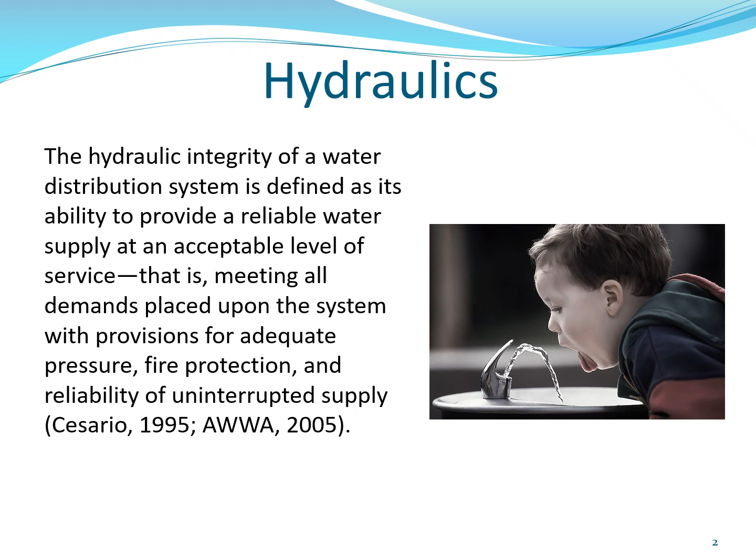That leads us into capacity. According to the Safe Drinking Water Act, Part 11, Sub-Rule 5, Number 1, distribution systems shall have sufficient capacity to meet peak demands, including fire flow demands where fire protection is provided, while continuously maintaining a minimum pressure of 35 psi throughout the distribution system under normal operating conditions, and 20 psi during emergencies such as firefighting. That last bit has a little more nuance to it.

So if a water system is to provide capacity, that means it in a bunch of different fashions. Capacity means you're able to meet the demand of your system regardless of what time it is, whether it's peak demand, low demand, and so on. Capacity can be met in a number of different ways.

Capacity can be met by making sure you have a water plant sufficient enough size to produce water to meet your peak daily demand along with your overall capacity. You may have well houses, making sure you have enough wells and enough water from those wells that they're not going dry and damaging the pumps, but are also able to provide enough water to meet the capacity and demand of your system.

And sometimes it's not just about the source that it's coming from. Sometimes it's making sure you have adequate water main size, that they are big enough to provide enough water and flow to meet your demands.

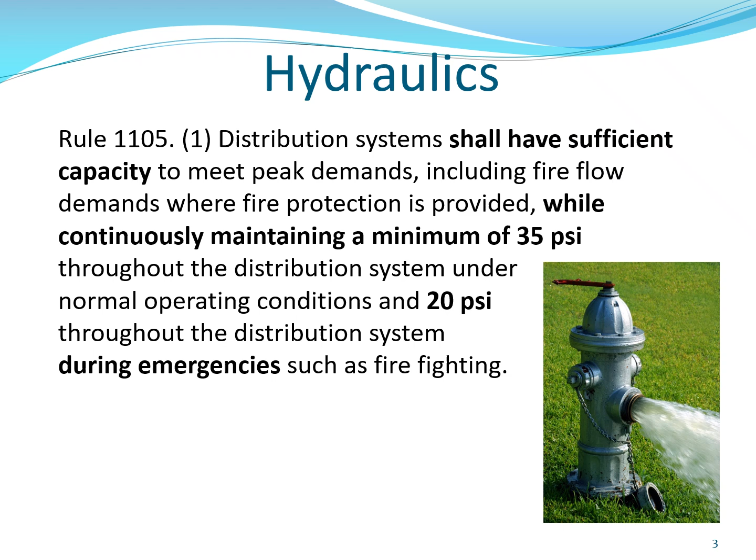Another thing is that a lot of times cities undergo reliability studies. The reliability studies make sure that all those things I just discussed are in place, meaning you have a way to provide adequate capacity to your system through various means, such as the right size water mains, water storage, and capacity at your plant or your well houses, and so on. All of these drawings and layouts of your system are going to be included in your general plan that we talked about with rules and stuff.

So if you remember, hydraulics is the study of liquids in motion and at rest, and water within your distribution system is at motion all the time as it's flowing through your pipes.

It's at rest in your storage tanks, and it takes the shape of the containers that it is put into. So it has a weight, it has a density, and water exerts pressure, especially if it's being driven by gravity.

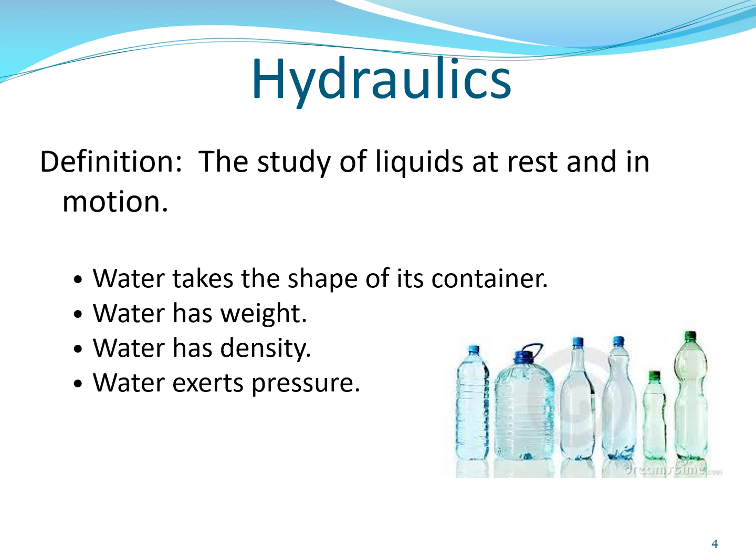The very first thing, if you remember, we talked about friction. Friction is the resistance of change in motion. Objects, or water included, want to resist motion, but when they are forced to move, there is friction involved. So as water moves through the pipe, it's going to experience friction loss moving through a water main. The rougher the pipe is, the more friction loss we're going to have.

Head loss is the amount of height that... well, head in general is the height of water, but head loss is in reference to the loss of vertical distance water can travel due to a conversion of its energy, and that would be friction. The more friction loss you have, the more head loss you have. We talked about that in that other section with that example talking about a water treatment plant.

Now, the next thing we're going to talk about is the continuity equation. We also talked about that a little bit, and that's talking about flow through pipes, and it also talks about flow through reduction of pipes. If you go from a 12-inch main to an 8-inch main, it's 100 gallons per minute as the flow in is going to be equal to the flow out. That is another thing to keep in mind when doing this.

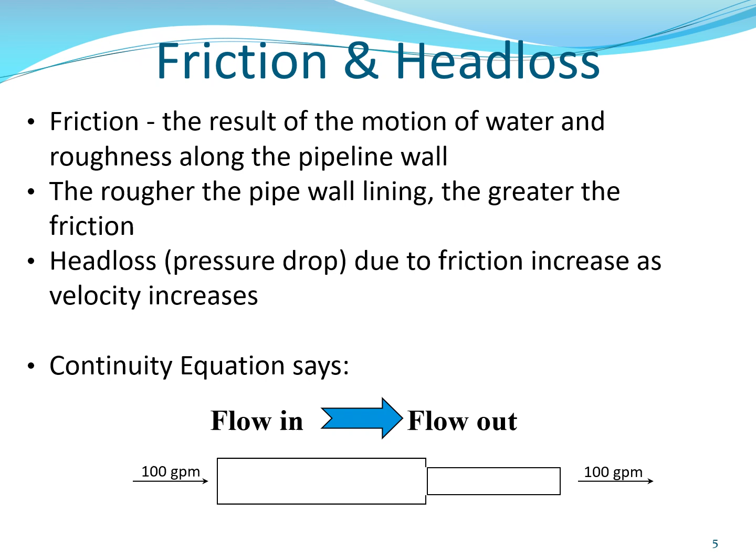Part of the presentation, we're going to talk about the various types of pumps, a little bit about history of pumps, some terminology about pumps, and just some general knowledge about the pumps that are used in the water industry. Let's talk about the history of pumps.

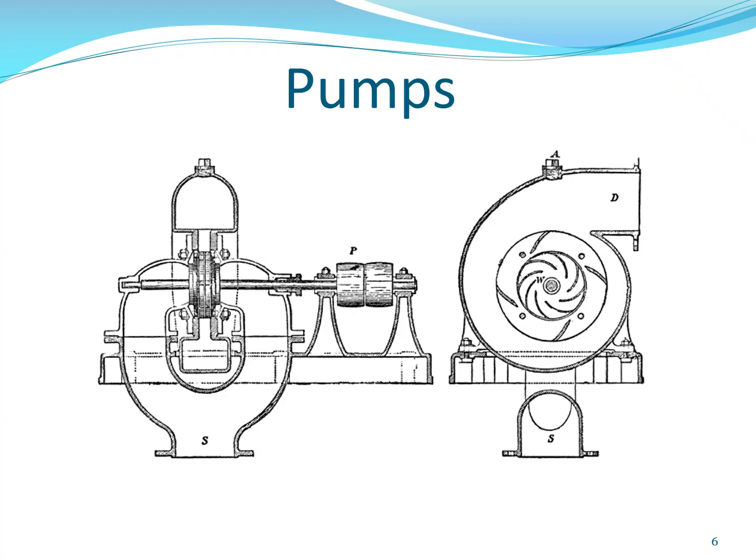So pumps, believe it or not, are over 2,000 years old. The first documented pump that we know of is the Archimedes screw pump, invented 287 BC by Archimedes, who was a Greek inventor and philosopher.

So what a pump is essentially is a mechanical device that transports liquids from an area of low pressure to high pressure, one of low elevation to high elevation, or it also moves more water. And you see this in various different things with our high and low service pumps at our plants, your booster stations, or even lift stations for wastewater.

The screw pump is still something that, when you hear of lift pumps, is still in use in wastewater, because anything that fits in the void space of it will be pumped. So pumps consist of some sort of impeller, some sort of drive device, and some sort of motor that moves this drive device in order to move the liquids from one area to another.

So they're going to be used in various different fashions for filling tanks, adding additional pressure, or just even adding more flow coming out of a well or coming out of a plant. And they're going to be driving into our distribution systems, our reservoirs, or even in booster stations to help just transport and add more pressure to our faraway customers.

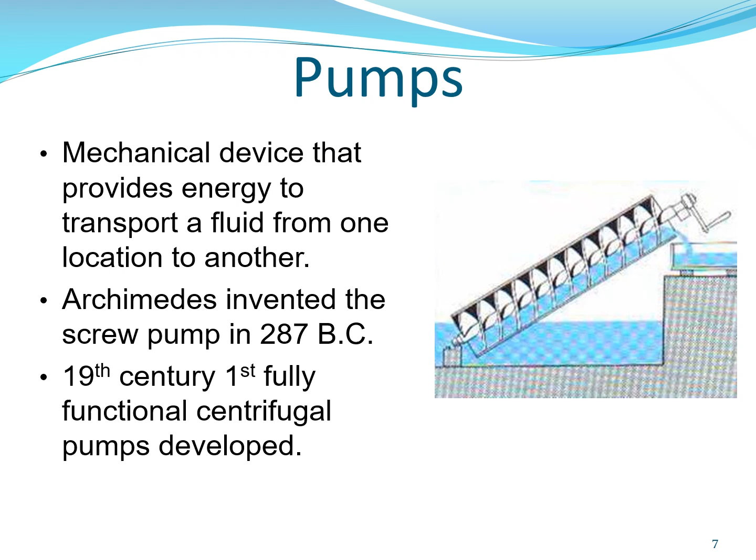So there are lots of different pump terms that can be used here. You have suction lift, static discharge, total dynamic head, prime, impeller, casing, shaft, shaft sleeve, packing, lantern rings, separator rings, packing gland, cavitation, brake horsepower, pump curve, and efficiency. And the thing is you don't need to know all these by exact definition, but you have to have an idea of what they are.

So suction head or lift is the vertical distance between the center line of the pump and the free liquid or surface of the liquid or water that is being pumped. Suction lift is lifting it. And suction head is feeding down into the pump, but it's from wherever that water line is down.

Then you have your static discharge head, which is the vertical distance that a pump, after the pump, can push the water. Now you have total dynamic head, and total dynamic head is a combination of the total amount of head or vertical space that a pump can move the water, either lifting it or pushing it, or a combination of both.

Prime is when a pump casing and the impeller shaft itself is completely full of water, so that when the pump is engaged or turned on, it is able to suck and pull water through it.

Now an impeller, this is a piece of the pump that pushes the liquid and moves in a circular motion using centrifugal force to push water.

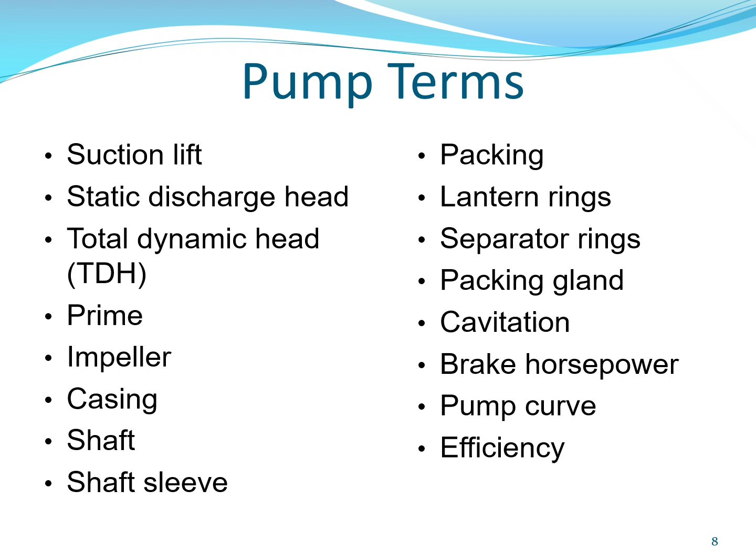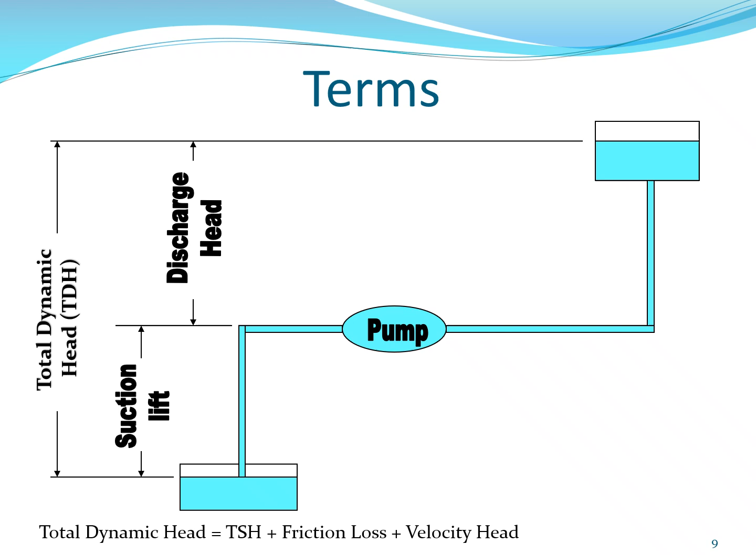Now, suction head is a little bit different. As you can see, suction head here feeds down into the pump. So when it's feeding down into the pump, and this is what you see a lot of with horizontal drive shaft pumps, the suction head is pushing down into the pump, and then it's discharging out. That is all known as discharge head, okay?

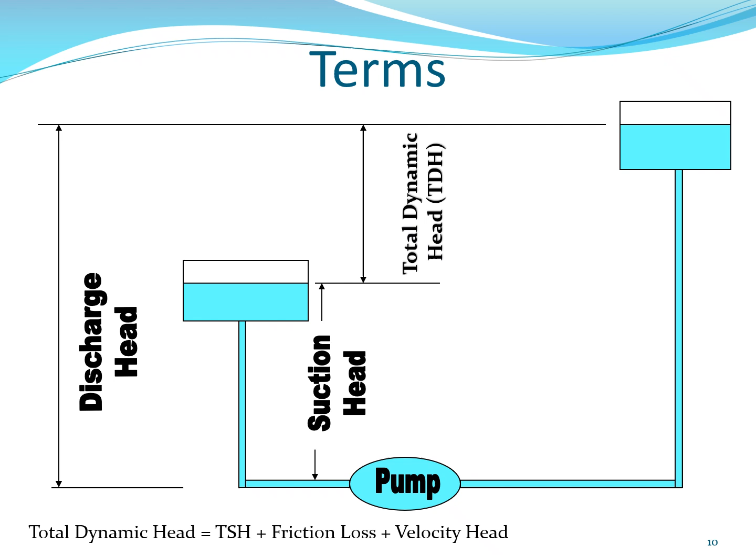So there are three main types of pumps that exist. The main other type is known as a jet pump, but we're not really going to talk about that. So we're going to be talking about centrifugal pumps and positive displacement pumps.

Your positive displacement pumps are your chemical feed pumps, all right? So we will not discuss jet pumps, which is the third type of pumps here, because jet pumps are not used in municipal fashion. They're used in non-community small installations, and they're used in houses too, because they work where they inject pressure down into the pump casing or well casing, and then it forces water back up. But those are not anything that produce enough water.

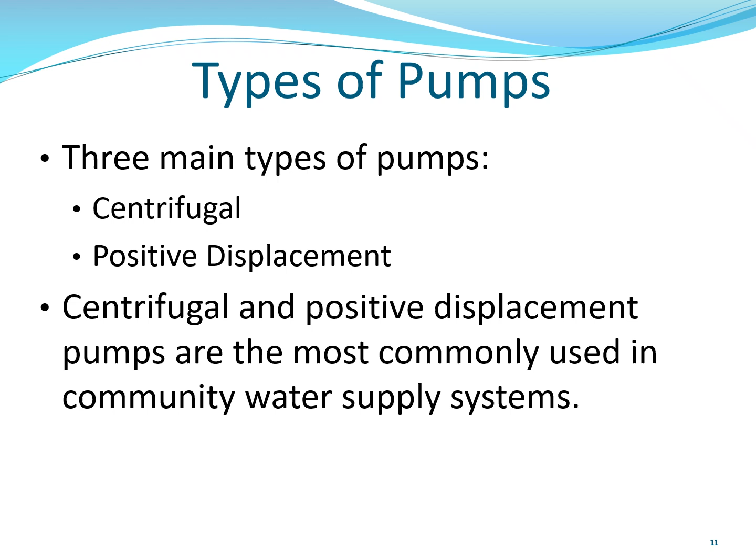So centrifugal and positive displacement are the most commonly used pumps in a community water supply. And like I said, positive displacement is a chemical injector pump, where centrifugal are the ones that are used for producing and pushing and sucking up water and discharging it from the treatment plant.

So the types of centrifugal pumps, all right, we're going to have a line shaft vertical turbine, a horizontal turbine, and then a submersible vertical turbine pump. Vertical turbines and submersible vertical turbines look identical to one another, just they operate a little bit in different fashion, and they're positioned differently in a well casing used for that.

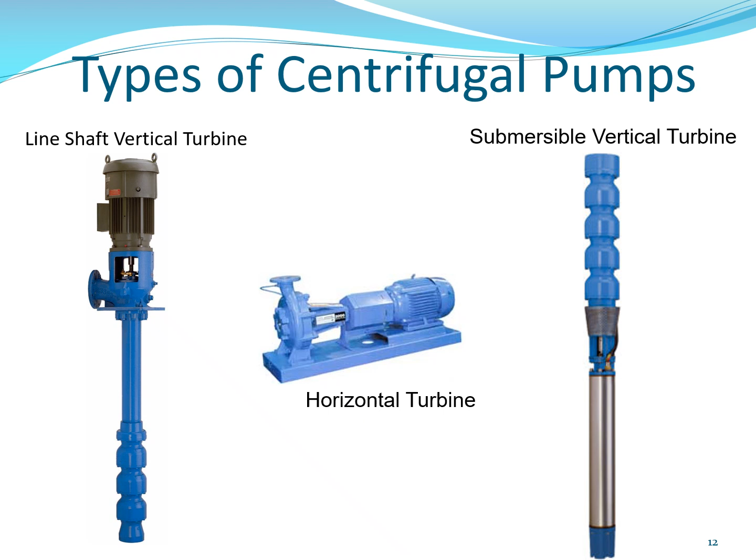Horizontal turbine pumps are different from both of these because they are in a left to right fashion where the motor sits horizontal to that of the impeller. And this is typically that suction head diagram you've seen earlier. That's typical of a horizontal turbine because water feeds down into it. We'll talk about that and show examples of that.

So one big thing to keep in mind is cavitation. Cavitation sounds like, when it's going through a pump, it sounds like your pump is literally pumping gravel. It'll make some pinging and dinging noises, so just think about what that would be.

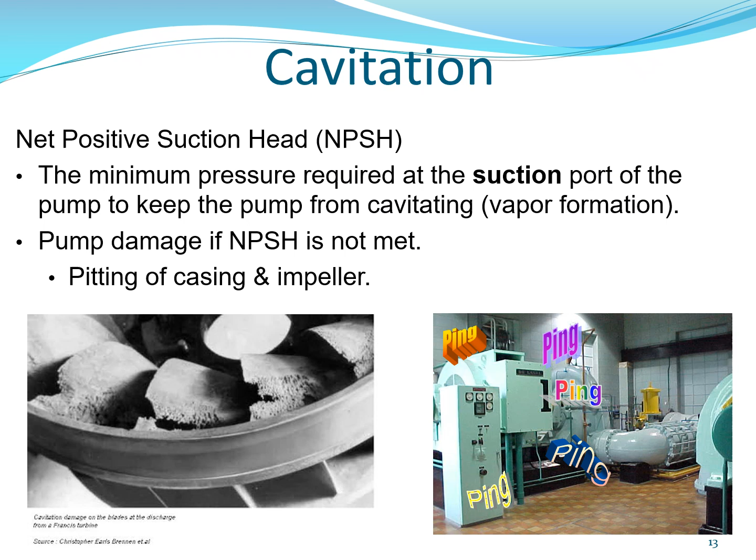So if you ever cavitate your pump, it's going to create vapor lock and vapor bubbles, which will then damage your equipment. It can increase corrosion rates because of the addition of air. These are very bad - the introduction of air bubbles during cavitation will cause long-term damage to your pumps.

So that's typical of horizontal turbine pumps - the water cascades into them because they often lose prime if not. But these are the two typical types of pumps you're going to see used for high and low service pumps at water plants, of varying different sizes. They can produce a ton of water, and can also serve as booster pumps if need be, especially the vertical turbines out in your area.

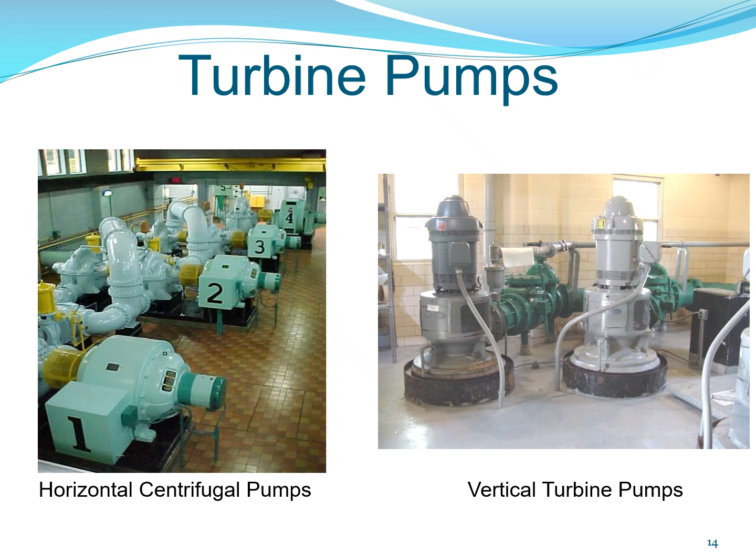So horizontals have a much shorter shaft on the left there versus a vertical turbine, which has a longer shaft directly into the clear well itself.

So one thing about line shaft vertical turbine pumps is they are common in pumping water in lots of different applications, especially because the impellers are lowered down into some sort of tank or clear well. The impellers rotate with the shaft.

I don't know that I talked about this, but you're going to get multi-stage impellers. The more impellers that are on a pump, the more pressure and total head it pushes. More impellers does not mean more water production on a pump - more pumps means more water production. The stages or impellers of a pump, this goes for any of them, just means it'll give more pressure to the water and push it further, giving it more head and energy.

So how this works is the water comes in down through the screen on the bottom of the shaft here. It comes into the first impeller, then it's fed up and kicked off to the left. As you can see, there's a void space up here at the top, and that void space is where you're going to find your stuffing box for maintenance on these things, with the packing gland and separator rings we talked about earlier.

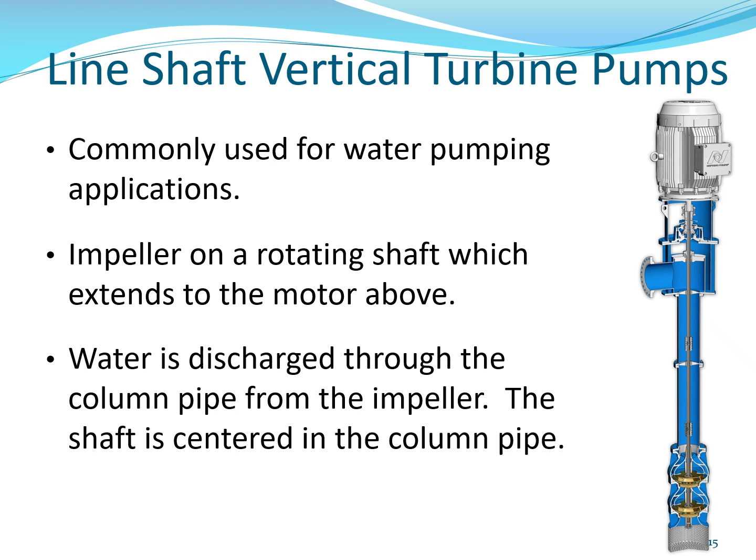And you have the pump right here on top, the motor's on top. As you can see, the shaft is centered directly down the case from it and into the clear well itself.

Horizontal centrifugal pumps have the motor lying horizontally. These a lot of times are high service pumps or booster pumps when priming is not a problem. That's why water needs to be fed down into these - if they are on a similar level, a lot of times they will cavitate themselves and lose prime. And when a pump loses prime, it's not necessarily going to move water as much.

So that's why they have to have suction head, meaning the water cascades down and they're typically below grade for that matter. So some of the disadvantages is the lubrication of it - because the water is held horizontal to it, the motor and pump shaft are directly in line with where the water is.

Whereas on a vertical turbine, the water's got to get up there - gravity, if turned off, is not going to allow it to get to it. Whereas in this horizontal setup, gravity pulling down into it could pose a problem with getting in there and lubricating the pump shaft and replacing the packing gland and so on. So lubrication and maintaining prime are the two biggest problems with horizontal pumps.

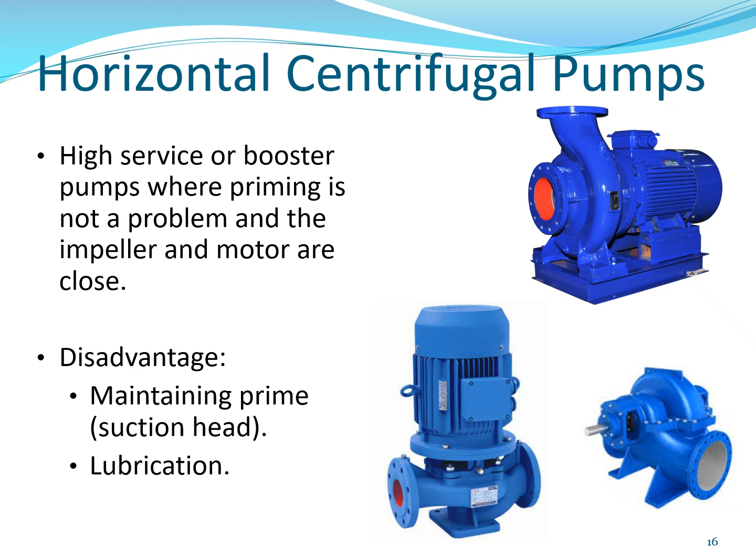So the next type of pump we're going to be talking about is submersible pumps. Submersible pumps are a lot like a vertical turbine pump, and they have a lot of similarities in what they look like. But the big difference about a submersible versus a vertical turbine pump is that it is reversed. The motor is mounted on the bottom of the impellers, and it's also lowered down your well casing and into your well. With submersible pumps, they're called submersible because they're placed on a well casing or they are completely submerged in water.

Now, with these, they have some advantages to them. Some of the advantages are they have no internal valves except the check valve. There's no lubrication needed due to the fact that they're lowered into a water column and always in water or some liquid. There's typically no need for any type of cooling apparatus because of this. They have a low initial startup cost, and they require little room in comparison to the capacity amount, and they're practically noiseless for the fact that they are lowered down into these casings.

So what's a disadvantage to these? One thing that needs to be talked about here with a submersible pump, they do make these all the way up to 2,000 horsepower. Another thing about submersible pumps is they have a very short shaft. But when these are operated on a VFD, you cannot just turn them down, because they are operated to have a certain amount of water flow through them.

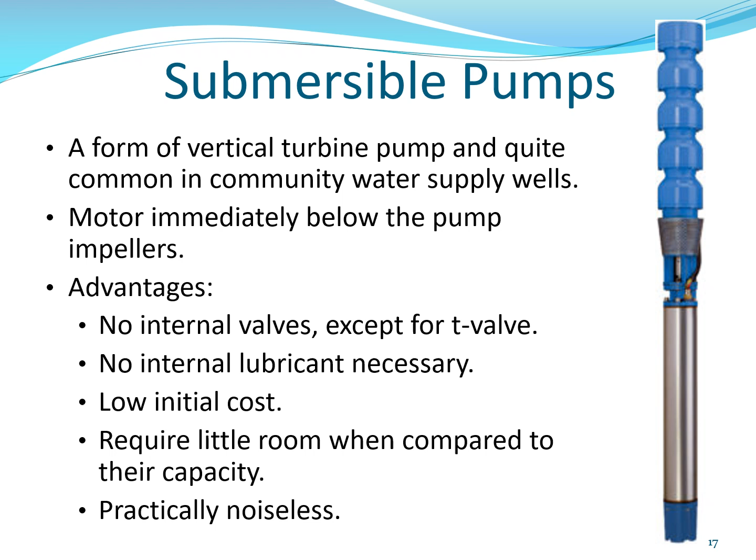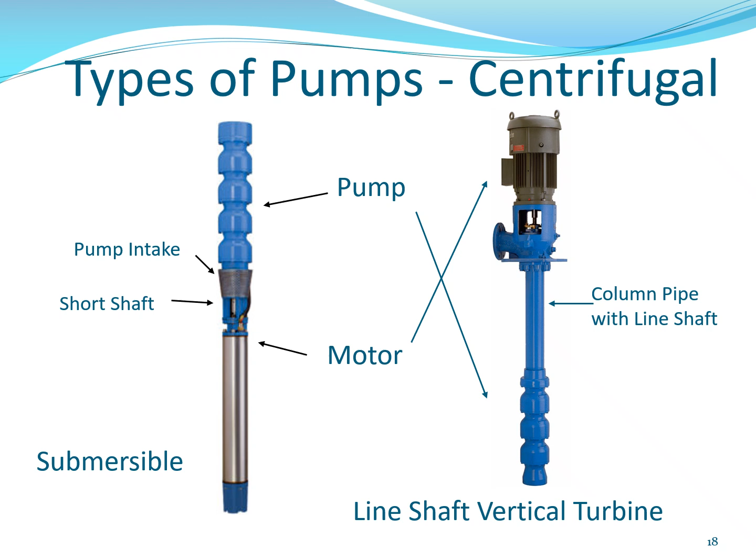So here are the different types of centrifugal pumps, showing the vertical turbine pump versus a submersible. You can see that they're very similar in nature. Now the shaft is much shorter on a submersible, and the motor location is separate. But as you can see, there's a pump intake screen, multiple impellers, and the water is pumped by the impellers moving in an upward motion and pushed or pulled. So it's very, very similar. The pump shaft is different. Of course, the submersible is not going to have your stuffing box with packing glands and separator rings and lantern rings like the vertical turbine does. But as you can see, they're very, very similar in nature here.

Now, on the next slide here, we're going to talk about impellers. There are three different types of impellers.

You have an open, a semi-open, and then you have your closed impeller. They each have their own functionality. Open is used for solids handling - this is what you're going to see in wastewater plants or with sludge pumps and so forth. Semi means it's dealing with moderate abrasive slurries - you could use this in pumping cement or sludge because it's mixed abrasive, not something that's going to have big chunks in it.

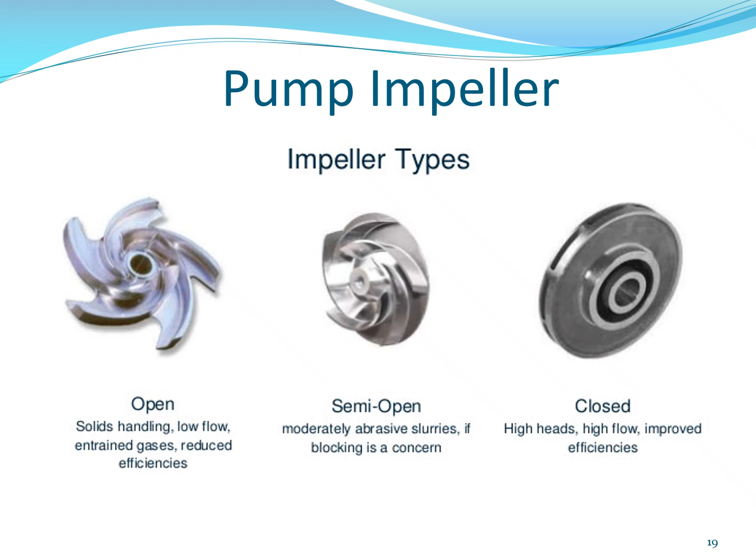Closed ones are used for high head, meaning lots of pressure to push the water, high flow, and improved efficiencies. Because it's a closed system, it doesn't have the void space that open ones have. The closed ones are what you're going to see on your high and low service pumps, your submersibles, and so on.

Here's a breakdown of some pump parts, showing impellers, casings, and horizontal setups. This is where they were replacing the horizontal impeller, done at the Saginaw water plant. This is a 33 MGD pump - that pump can produce 33 MGD, which honestly in this realm of things is kind of small fries compared to some much larger plants.

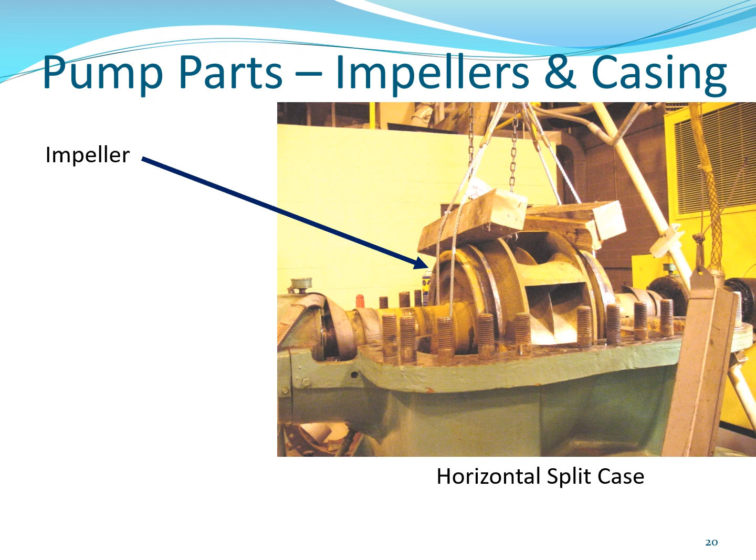Here's showing how the impeller works. The water enters through the middle of the impeller, and as the impeller spins, it throws it out into the impeller casing using centrifugal force. It uses circular motion to give the water pressure. As it spins, it throws the water out, and with additional stages, it moves up to another impeller, which gives it more pressure, then up to another, giving more head. So multi-stage pumps do not produce more water, they produce more head.

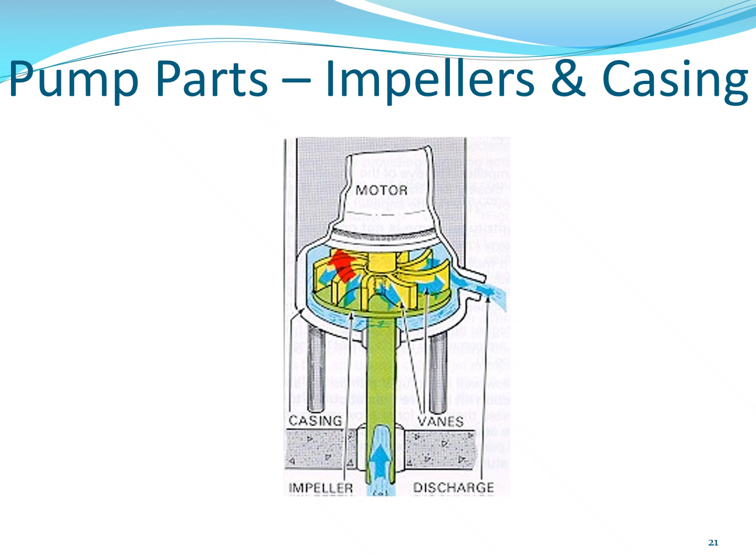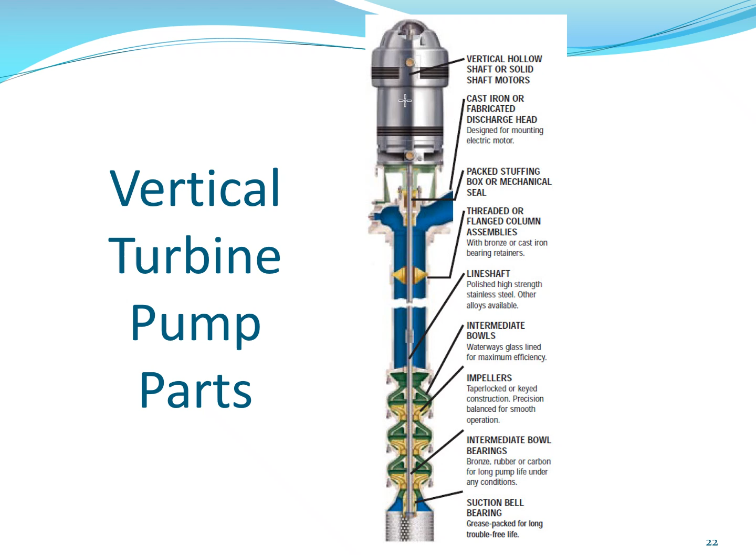Here gives you an idea of what you're looking at with vertical turbine pump parts. With a vertical turbine, you have your motor up top, then your packed stuffing box, which includes your lantern rings, separator rings, and so on. Then you have your line shaft, and on it you'll have your shaft coupler and shaft sleeve down it. You have your impellers and your bowl bearings attached, and then your screen at the bottom that brings this all up. As you can see, this is like a 3-stage pump here.

Now as it continues, you have your packing gland, which looks like a nylon rope impregnated with graphite, and it's cut to fit typically. As you're restuffing the box, you cut these glands to fit, put a separator in, do another one, and there's going to be multiple. You want to make sure after you've repacked a stuffing box that you do not tighten it too tight - there are specifications for how these are supposed to be packed and tightened. If you tighten them too tight, there's a good chance it will not get the leakage that is necessary. A lot of times in a plant you're going to see little channels cut out on the floor - those channels are on purpose, allowing the leakage occurring from the pump to go down a drain so it isn't a slip and fall hazard.

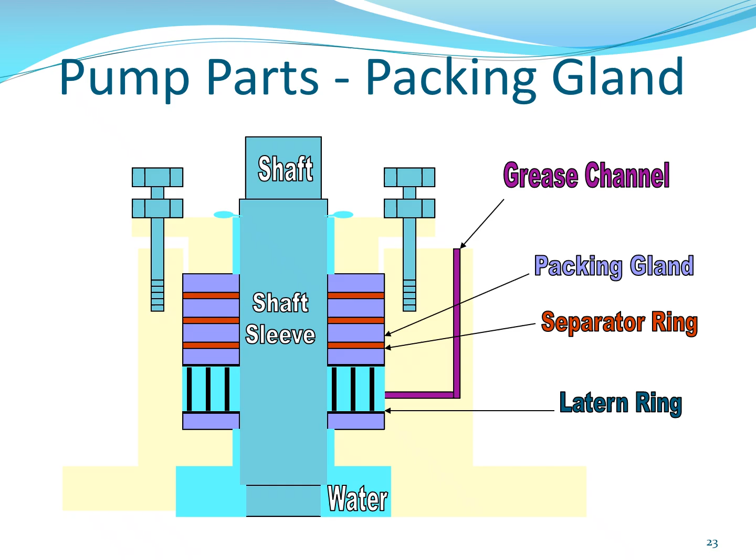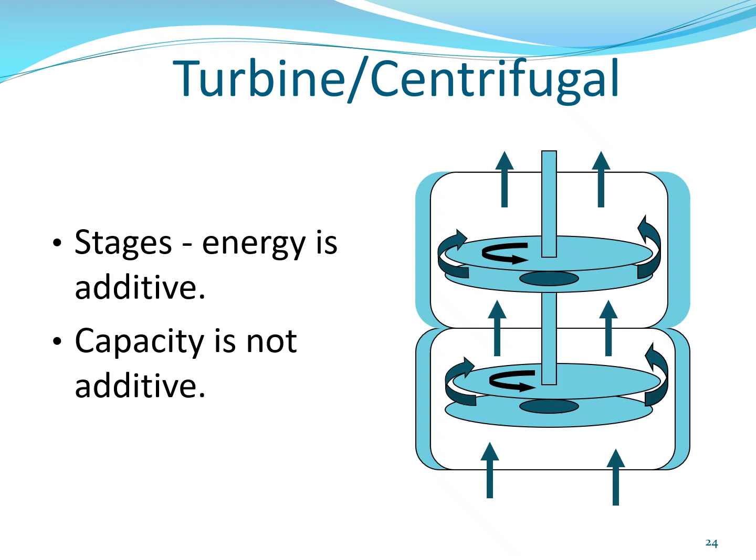The reason we call them turbine and centrifugal is because the water comes up in the middle, spins in a circular motion, and throws the water out and up. Then it continues on to another stage. Like I've said multiple times, stages add energy, not capacity. If you want more capacity, you have to add another pump. Stages will not do it.

Now, positive displacement pumps. There are lots of different positive displacement pumps out there: diaphragm, peristaltic, gear, and piston. But the two we primarily use for positive displacement pumps in our water systems are diaphragm and peristaltic. These are used for chemical injection. Some have self-metering or self-feeding using electropotential measurement to adjust their feed rates. Some are manually adjusted after a check. It just depends on what type of system you have. Your larger systems are going to have online SCADA that self-adjusts based on how things are changing.

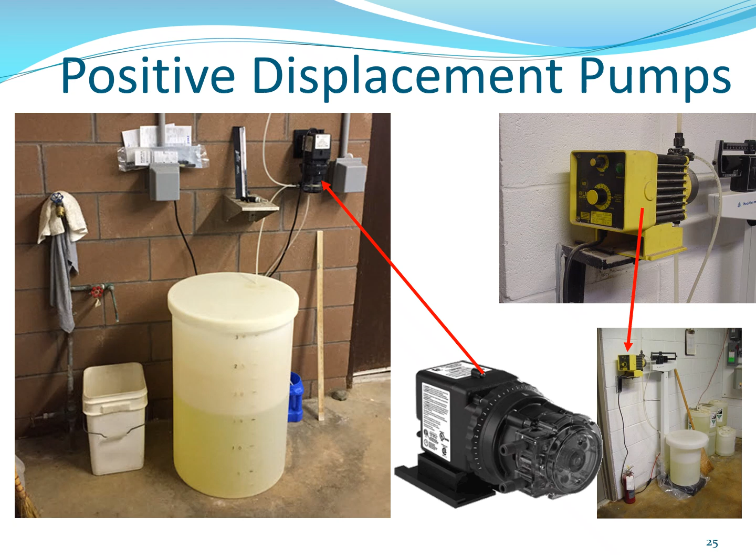A lot of these do not have an internal prime or internal pressure. They automatically prime and pressurize the minute they're energized. Diaphragms work in a pushing-pulling motion where they push and pull an orifice of some kind that creates pressure for input on a check valve system, typically on the back of them. Peristaltic pumps have rollers in them, and we'll see some different things with that. Many older pumps are piston type, but diaphragm and peristaltic are the new common ones that everyone uses.

I'll caution you that a lot of these can have a very large amount of pressure on them, peristaltic and diaphragm both. So to be safe, if you're doing maintenance on them, please ensure that they are de-energized. Now peristaltic works a little bit differently. A peristaltic has a rubber tube and a set of rollers, and as the rollers hit the tube, that's the certain amount of volume that's allowed through. That's why these are called positive displacement — they have a particular amount of volume they move in each action. They also have no need for gaining prime because they can get prime immediately just upon being activated and energized.

On these peristaltics, sometimes when doing maintenance you have to replace the rollers and the rubber, but often the initial maintenance is just replacing the rubber tubing itself. They've made these so the rubber tubing only fits in a particular area or way, and particular tubing might only match certain peristaltics, as they are proprietary. Now, if doing maintenance on a diaphragm pump, when it comes to the rebuild kit, it's very important to replace all the valves and O-rings that come with it, especially the multi-mix valve, just to ensure everything works properly. You want to use all the O-rings and check valves it comes with to ensure it's all proper. Choosing to ignore one of those gaskets could end up in failure of your equipment, and it could cause harm to someone.